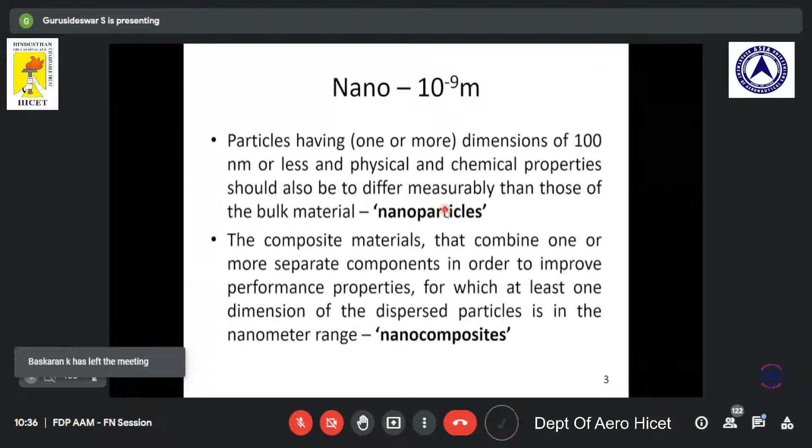When we combine nanoparticles in a matrix, then it is called nanocomposites. We know composite materials combine one or more separate components in order to improve performance properties. So if I disperse a nanoparticle in a matrix, then I can call it a nanocomposite. The purpose of going for nanocomposites is to have better performance - that's why we disperse nanoparticles in a matrix.

This is called nanocomposites. Now I'm going to talk about different nanofillers. Researchers have been using these nanofillers for a long time, since two decades. I will give some idea about different types of nanofillers which we use for different applications. We can categorize the nanofillers based on its shape and size.

You can see the nanoparticles come in layers. You can see it's like a layer where the thickness is nanometer. That's why we call it a nanoparticle nanofiller, wherein the other dimensions are in micron size, but still one dimension is in nano.

So that's why we call it a nanofiller or nano layer. An example is clay, a layered nano layer material. And then we have nanotubes, where you can see the diameter of the nanotube is less than 100 nanometers.

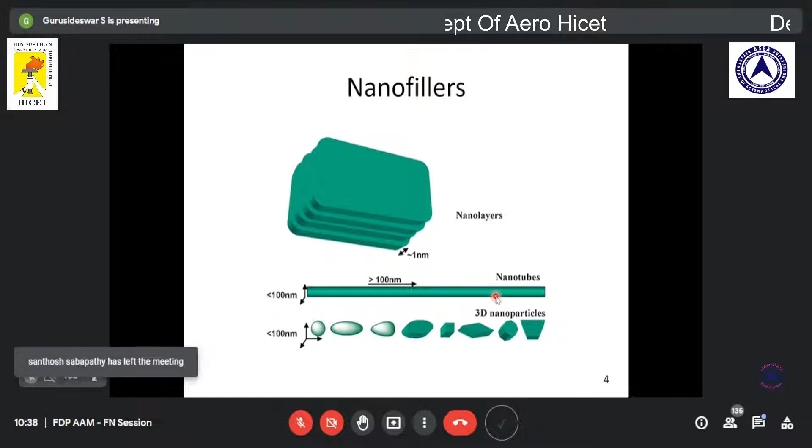So we can say it's an example of a particle nanofiller. The very common example is carbon nanotubes. We have many nanoparticles with different shapes, sphere shape, hexagon, and so on. So I've explained the different types of nanoparticles based on its structure, ranging from layer to tube to different 3D shapes.

So let us discuss nanocomposites, because in this whole talk I'll be focusing on nanocomposites. It's a two-phase material. As I told earlier, a composite is a two-phase material, and the important significance of composites is that we can tailor the properties based on our requirement. That's why we go for composites.

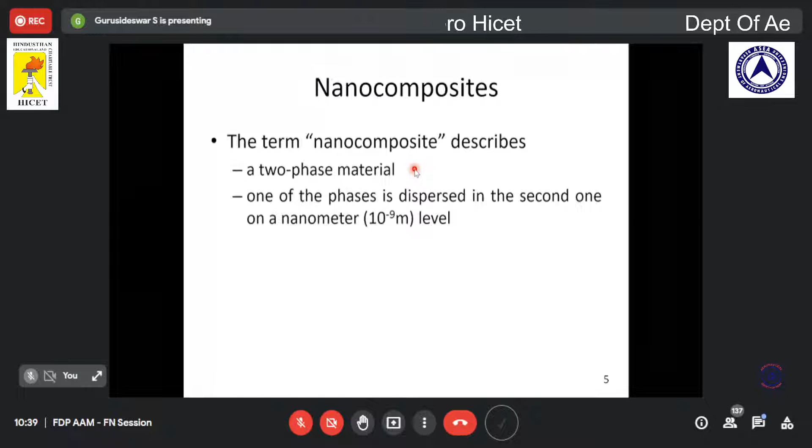Again, it has two phases: one is the reinforcing phase and the other is the matrix phase. We can categorize composites based on the reinforcing phase or the matrix phase. By reinforcing phase, we have fiber composites, particle composites, and flake composites. By matrix, we have polymer matrix composites, metal matrix composites, and ceramic matrix composites. So the composites can be categorized based on the type of reinforcement and the matrix.

Now we are going to see nanocomposites in today's talk. It's a two-phase material where one of the phases is dispersed in the second one on a nanometer level, which is called nanocomposites. In this work we have chosen clay as the nanoparticle and epoxy as the matrix, so we are dispersing clay in the polymer matrix, which is why we call it a polymer nanocomposite.

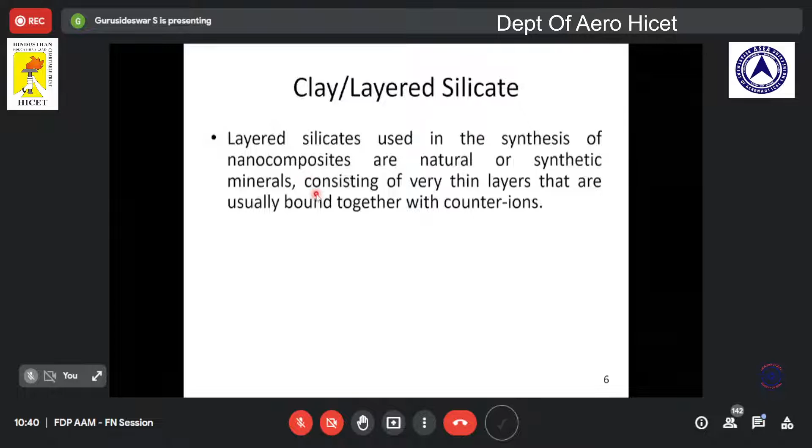Now let's look at the definition of clay. It's a layered silicate, naturally available, consisting of very thin layers usually bound together with counter ions. As I showed in the previous slide as an example of a nano layer, it has a layer thickness of 1 nanometer, and the lateral dimension may vary from 30 nanometers to several microns.

Because of this, we have a very good aspect ratio, which is length by thickness. By using nano clay we can get a very high surface area, around greater than 1,000. The layers are separated by a regular van der Waals gap, called the interlayer or gallery, which we'll discuss in future slides.

So here is the structure of a nano clay, and on the right hand side is a typical scanning electron micrograph of raw clay, taken at around 23,000x magnification. You can see it's like a layer, with nano size thickness and micron size length. But this clay is in raw form, in an agglomerated state, not dispersed in a matrix. We simply took a pinch of clay and got this micrograph using scanning electron microscopy, SEM.

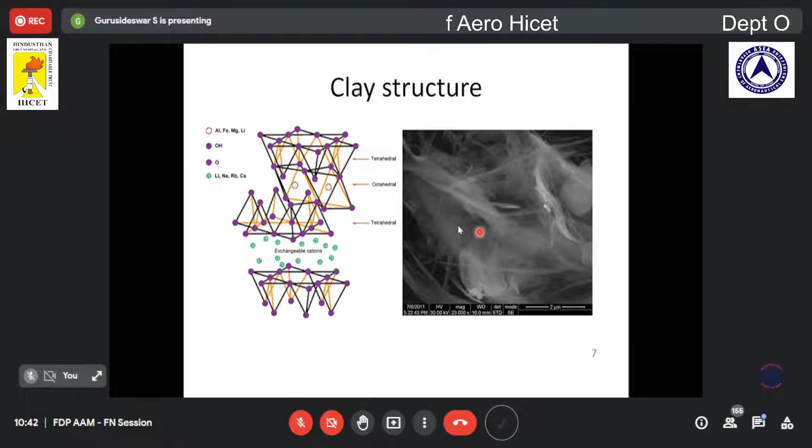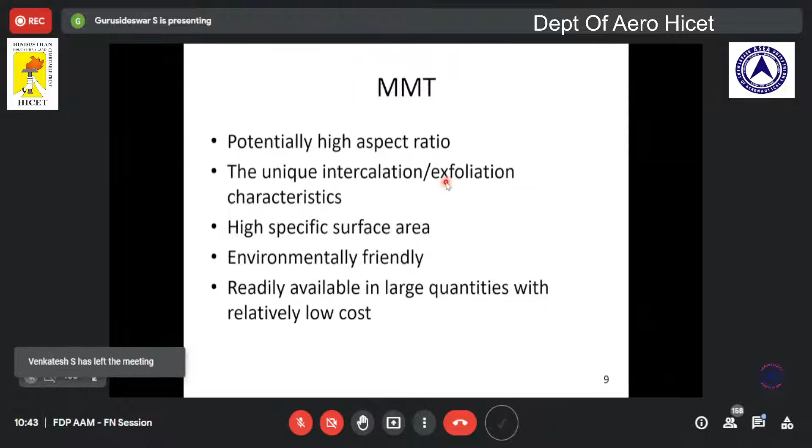So again, here I have given some significance of MMT, that is Montmorillonite clay. It has high aspect ratio, unique intercalation characteristics - I will come back to this terminology later - and it has high specific surface area. It is environmentally friendly, readily available in large quantities, and has low cost. So because of these reasons, we have taken this Montmorillonite clay for our research work.

So again, this slide gives some idea about different types of commercially available clay. As I told, this nanocomposites field has gone up in recent decades, so several researchers have worked on this area, and different types of clay are available commercially. Here I have given some commercial names, like from Southern Clay Products we have Cloisite, we have Garamite - this is the clay which we have used for our research work. We have clay from Bentone, from Elementis, and we have clay from Germany product Nanofil. Like that, there are many different types of clay available commercially.

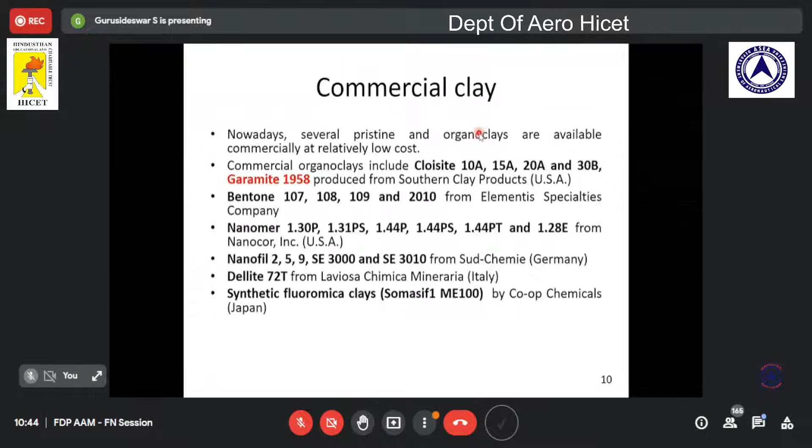Also we have different types of clay. One is pristine clay, that is unmodified clay. I will come back to this point later - why do we go for modified clay? So this is the types of clay which many researchers are focusing on. Let me come to the important point of this clay dispersion.

So this is the layered silicate. Already I have discussed about layered silicate. So to prepare the nanocomposite, we need to disperse or mix the clay with the polymer. So when I mix the clay with the polymer, I will end up with 3 different types of dispersion.

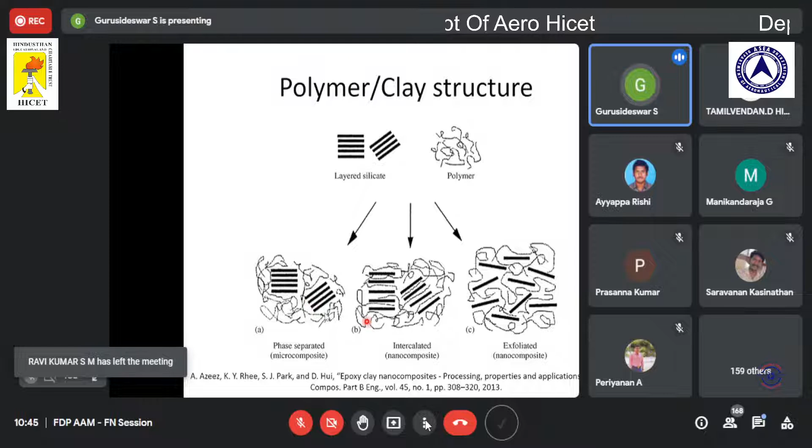So you can see, one is phase separated microcomposites. If you see in this phase separated composites, the particles are in agglomerated stage. You can see this is one type of structure we get, and then intercalated structure.

So this is a structure where we can get a very good dispersion - it's intercalated, where the clay has been arranged and dispersed in a parallel fashion. You can see the figure, you can see the layers.

The third one is exfoliated. So this is the structure which we want. Here you can see the clay has been dispersed randomly, and we have good dispersion. This good dispersion of clay in a matrix will lead to improvement in the properties. So we focus on this dispersion, but it is not easy to get this dispersion. We need to follow some techniques to get this good dispersion. Let us see in detail in our next slides.

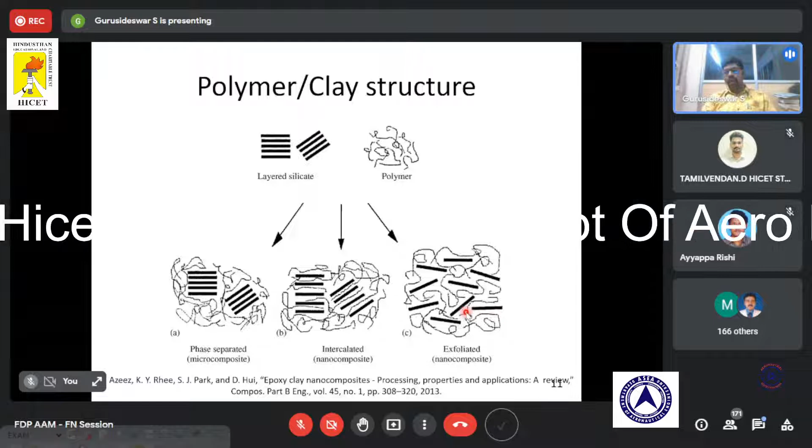So in this slide I wanted to convey that by mixing a nano filler in a polymer, we end up with 3 different types of structure - one is phase separated, then intercalated, and exfoliated. Among these 3 structures, we focus on exfoliated. This is the structure which we want, and from this structure we can get a very good improvement in the mechanical properties.

Okay, here I have just given the history of nano clay. It has been used by Toyota researchers in Japan in the 1990s. They discovered this possibility to build a polymer layered silicate nanocomposite. They dispersed this nano clay in a polyamide matrix, fabricated the nanocomposite, and then did a lot of characterization. They found the addition of nano clay in the polymer matrix led to very good improvement. So this is the very first research made on nano clay, and then later it was extended to epoxy.

So earlier they focused on polyamide, and then many researchers extended this work to different polymers, not just epoxy, but polyester, like that. And then they have conducted many works in this area.

So now so far I have talked about what is composite, what is nanofiller, what is nanocomposites, different types of nanofillers, the dispersion of nanofiller in epoxy, and the history of nanoclay - like that we have discussed so far. Now let us see how to prepare the nanocomposite. So this is a very important topic, right? Let us see how to prepare a nanocomposite.

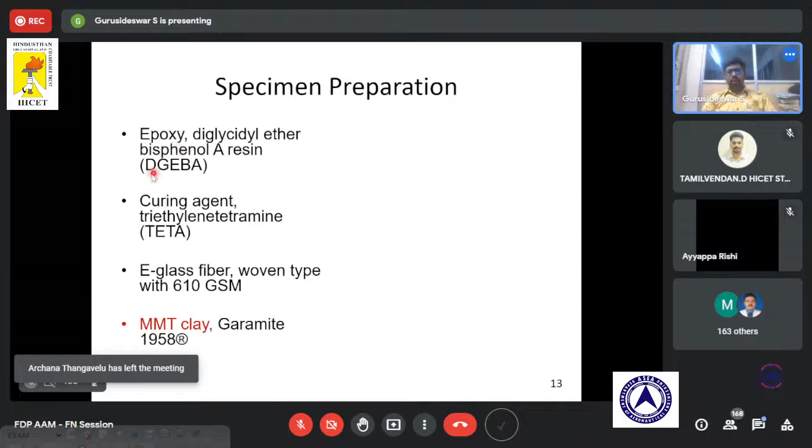So in this work, we have used epoxy. Epoxy is a thermoset polymer. We have used diglycidyl ether of bisphenol A resin. It's a commercially available resin, which was bought from Huntsman supplier. And then we used a curing agent - I hope many of you know in this area, we have 2 different types of curing agent: one is anhydride and amine type curing agent. This type of curing agent we can keep at room temperature itself.

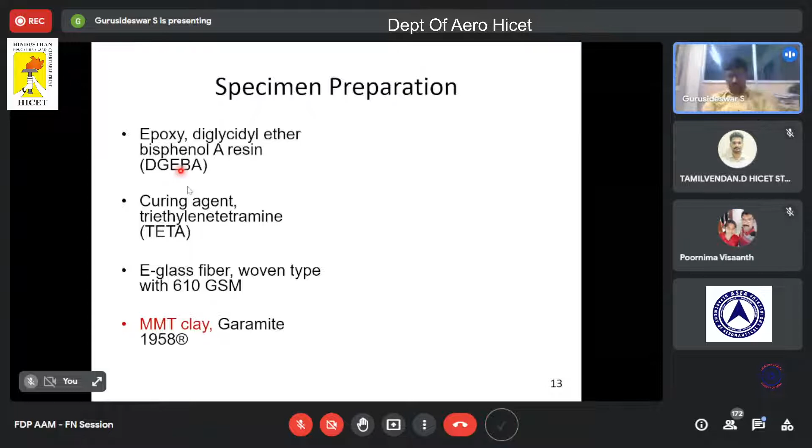And then we also focus on hybrid nanocomposite, because we wanted to understand the effect of clay on a traditional composite. So in the whole work, we are going to see 2 different types of material. One is purely polymer epoxy clay nanocomposites, where we disperse the clay in epoxy.

And the second one, we are going to disperse the clay in a traditional composite, like a traditional FRP composite. So we have used an e-glass fiber, which is commercially available. It's a woven type fiber, with 610 GSM, grams per square meter. This is the primary reinforcement, and we add clay as a secondary reinforcement.

As I told earlier, we used modified montmorillonite clay, and the commercial name is Garamite 1958, which was supplied by Southern Clay Products USA.

So now, to prepare the nanocomposite, we need to design the parameters. We need to focus on how much amount of clay we are going to add. Based on our survey, we found that higher clay weight percentage leads to poor dispersion. So that is why we stick with 5 weight percentage. If we go beyond 5 weight percentage, then we may not get good dispersion of nano clay with polymer.

So based on the survey, we have chosen these 3 parameters. For example, 1.5 weight percentage means we take 100 grams of resin and 1.5 grams of nano clay, and then the clay is mixed with epoxy like that. So we took 3 different weight percentages of clay to fabricate the nanocomposite samples.

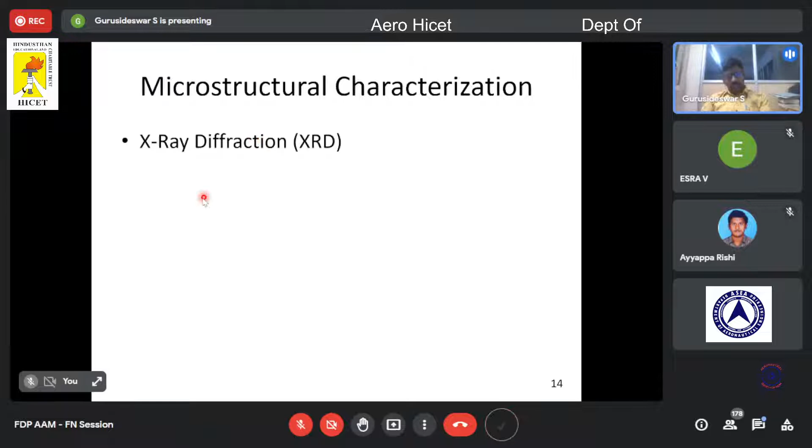Now it is very important to understand how the clay has been dispersed in epoxy, because as I told earlier, we are working at the nano level. We cannot see the dispersion with our naked eye. So we need to go for some high-end tools to understand the dispersion of nano clay in the epoxy matrix.

We have used scanning electron microscopy, transmission electron microscopy, laser-induced breakdown spectroscopy, and also some other techniques to understand the dispersion of nano clay in the epoxy matrix. This slide shows the wide-angle X-ray scattering.

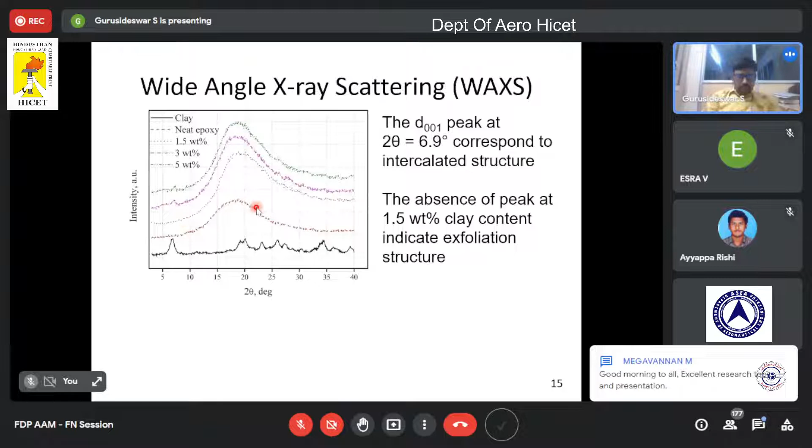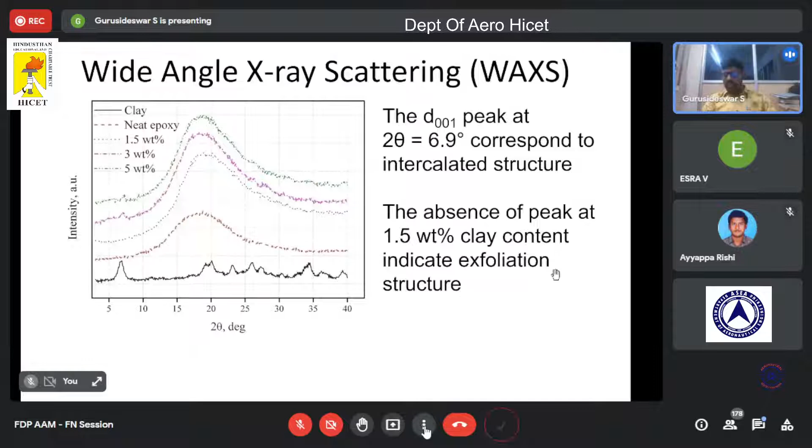Here you can see the observation of a peak at D001, which corresponds to the intercalated structure. If you observe carefully, we do not see any peak for 1.5% clay. That means 1.5% clay provides good dispersion. So this is what we understand from this wide-angle X-ray scattering. The absence of a peak at 1.5% clay content indicates an exfoliated structure, which indicates random dispersion of clay in epoxy.

So here I have given a pictorial representation of the different structures. You can see the intercalated structure - we do not see good dispersion here, the clay has been arranged in some parallel fashion, in a bit of an agglomerated state. Whereas on the right hand side, this exfoliated structure shows the clay dispersed randomly. This is what we want, and this dispersion we achieved at lower clay loading, around 1.5%.

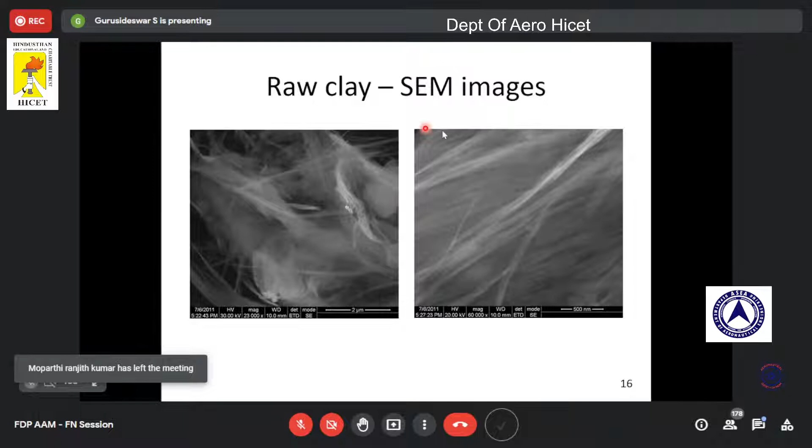So here I just wanted to show the different magnifications of raw clay. This left hand side micrograph shows low magnification, around 23,000x.

You can see it is an agglomerated state, wherein the right hand side shows higher magnification of nano clay, around 60,000x. This was taken using scanning electron microscopy.

We also performed small angle X-ray scattering. In wide angle scattering, the angle ranges from 0 to 40 degrees, but we wanted to focus only on small angles, since the D001 peak corresponds to the intercalated structure. That's why we did small angle X-ray scattering, from 0 to 10 degrees.

We observe the same trend here. The black line shows agglomerated raw clay, and the red line shows 1.5%, where we do not find any peak, indicating good dispersion. Whereas 3% and 5% show a peak, meaning the dispersion is less uniform.

Here you can see the transmission electron microscopy. In the last figure I showed scanning electron microscopy, where the micrograph was taken at the surface level. In TEM, the electrons transmit through the sample.

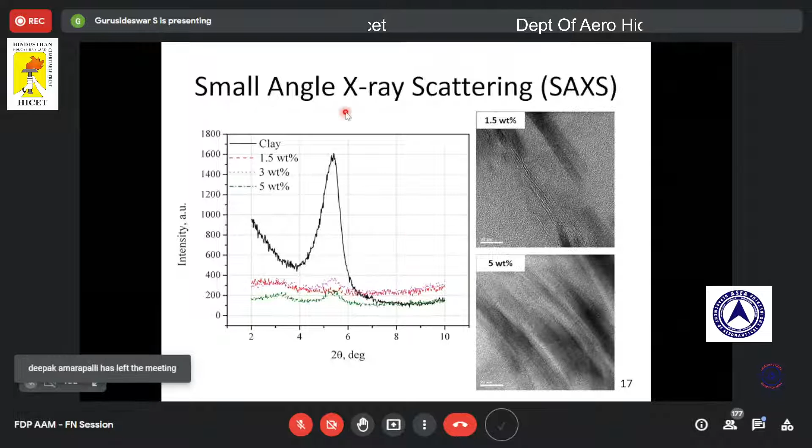This is the transmission electron microscopy image of 1.5% and 5% clay. For 1.5% you can see random dispersion, but for 5% it has agglomerated. So we have understood the dispersion of clay using different techniques: wide angle X-ray scattering, small angle X-ray scattering, and TEM.

We also employed laser-induced breakdown spectroscopy. This equipment is available at IIT Madras with Professor Nilesh J. Vasa. We send laser energy onto the sample and understand the different compositions in epoxy.

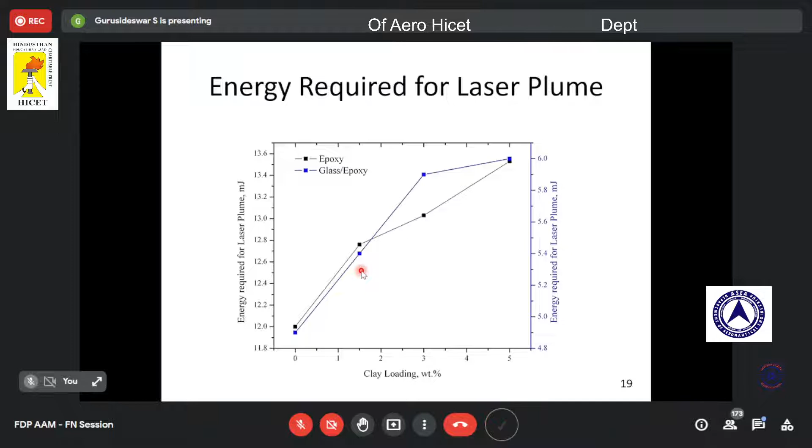We observe the same trend for glass epoxy composites. The blue shows glass epoxy, again at 0, 1.5, 3, and 5%. For neat epoxy without clay, we need 12 millijoules, whereas for 1.5% we need higher energy, 12.6. So the idea is that addition of clay in epoxy and glass epoxy leads to higher consumption of energy to produce laser plume.

Now let us focus on mechanical characterization. So far we discussed microstructural characterization; now let us come to the mechanical characterization of nanocomposites. How are we going to characterize the mechanical performance of nanocomposites? Using different techniques: tensile testing, flexural testing, impact testing, hardness, and so on.

I'm going to brief each testing one by one, and mention the standard we used. For tensile testing samples, we used a dog bone sample as per ASTM D638, and performed the testing using a universal testing machine.

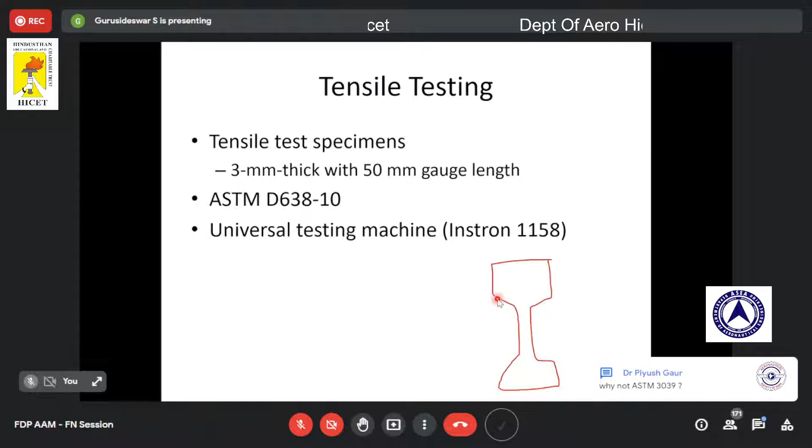So we used a dog bone shaped sample. I hope many of you are aware of the dog bone sample, which we used to understand the tensile behavior. The purpose of having a larger area is to avoid stress concentration, because this grip area will be rigidly fixed in the tensile machine. So in order to avoid grip failure, we have higher surface area, and also if you have a sharp corner, this will lead to stress concentration. That's why we go for this curvature, so that we can expect the failure to happen at the gage length, so that I get accurate results. That's why we go for the dog bone sample.

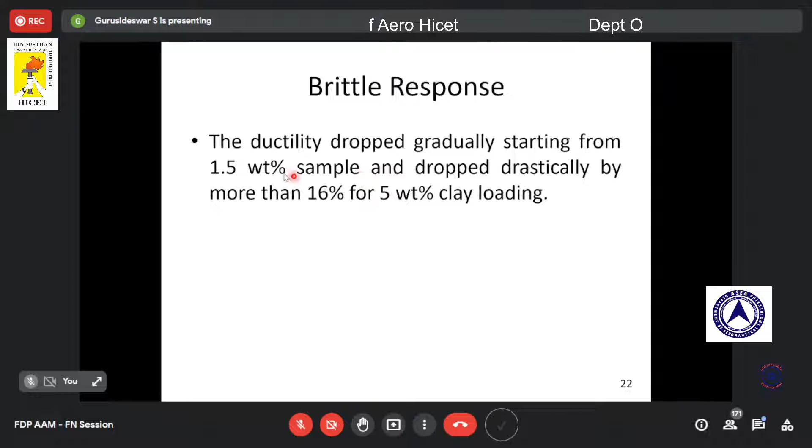This has ASTM standard D638, and this is the response we get from the tensile testing. As clay is a brittle material, we expect that when we disperse clay with epoxy, there will be a drop in ductility. This is what we observe, and the same observation was also reported by many researchers.

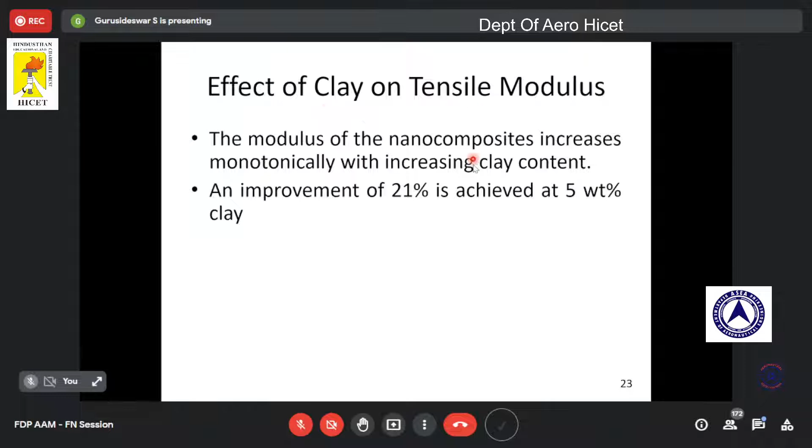Here I have presented the effect of clay on tensile modulus. The addition of clay in epoxy leads to good improvement in tensile modulus because of its good dispersion and because of the good interfacial adhesion between the nanoparticles and the epoxy matrix.

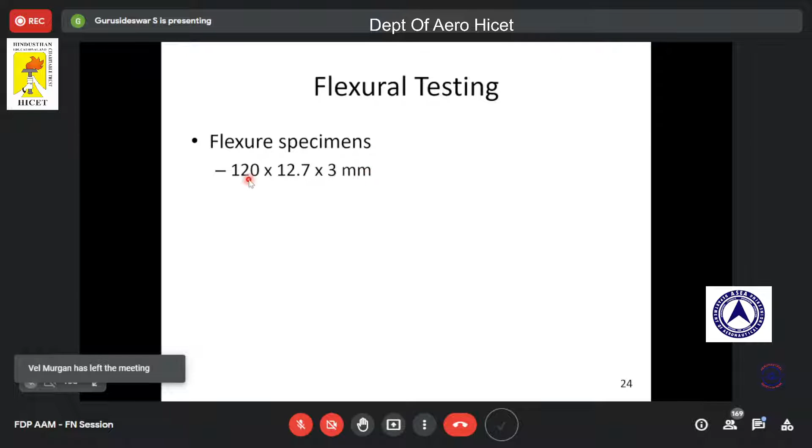And then for flexural testing, again we used small beam samples as per ASTM D790, and we used a 3-point bending configuration. You all know 3-point bending configuration - it is supported on two supports, and the loading acts at the middle of the beam. This is a typical 3-point bending configuration.

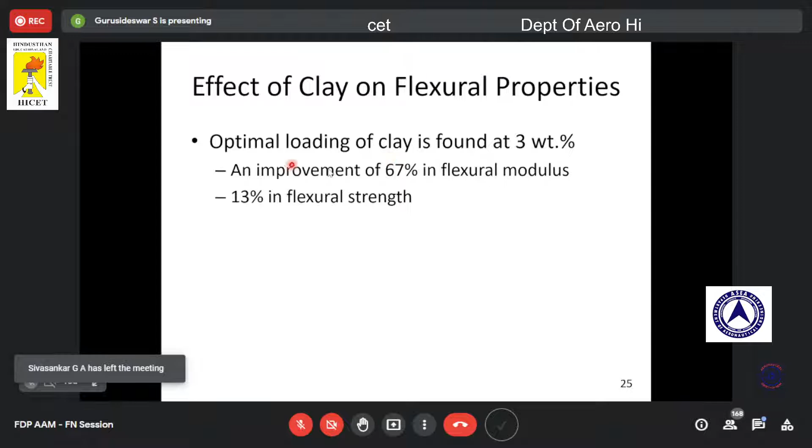So, the effect of clay on flexural properties. Again, similar to tensile properties, we found improvement in flexural modulus by addition of clay, and also good improvement in flexural strength. But one drawback is that we found voids at higher clay content, and these voids lead to premature failure.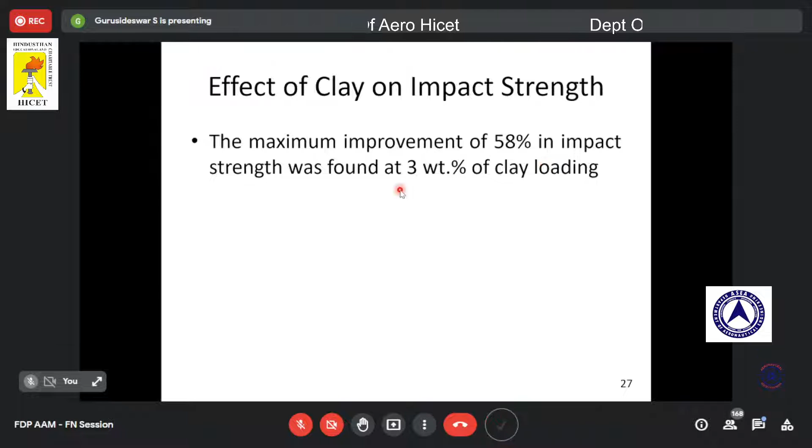Then we performed impact testing as per ASTM standard D256 - this is the sample dimension. Again, we got good improvement in impact strength by addition of clay in epoxy. But as I told earlier, at higher clay loading, because of agglomeration and voids, we could not achieve good improvement for higher clay loading samples.

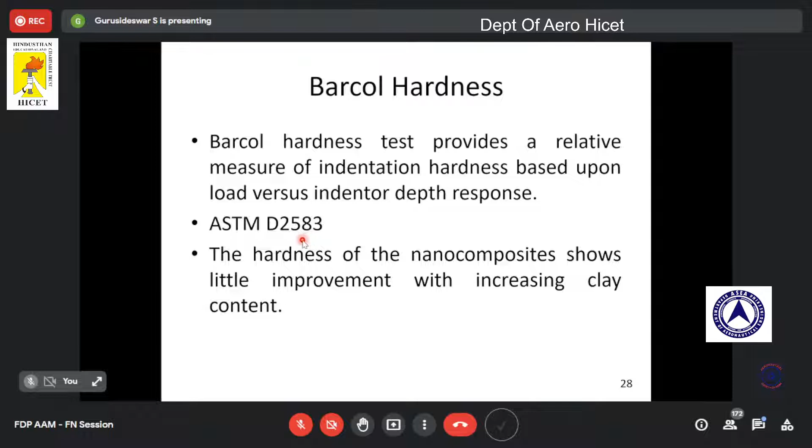And then barcol hardness testing was also done as per ASTM standard D2583. The hardness again shows improvement with increasing clay content.

Here I have consolidated the effect of clay on mechanical properties. The addition of clay in epoxy leads to about 21% improvement in modulus and 15% improvement in strength, in tensile testing. Again, a very good improvement in flexural modulus, around 22% improvement in flexural strength, and around 58% improvement in impact strength.

This is a typical fracture surface of the epoxy - this figure was taken after tensile failure. We took the failed sample to the SEM, scanning electron microscopy, and captured this micrograph. This shows a typical brittle failure, as we can observe from this micrograph.

We also wanted to understand the effect of clay in glass epoxy. As I mentioned earlier in my previous slides, throughout this talk we use two materials. One is polymer nanocomposites, where we disperse clay in epoxy and study its mechanical performance. The second is understanding the effect of clay in a traditional composite. You know a composite, right? FRP is a composite where the fiber is the major reinforcement and the polymer is the matrix. So in a traditional composite material, we added nano clay and found good improvement. Here I have listed the improvement in mechanical properties when we disperse clay in glass epoxy composite.

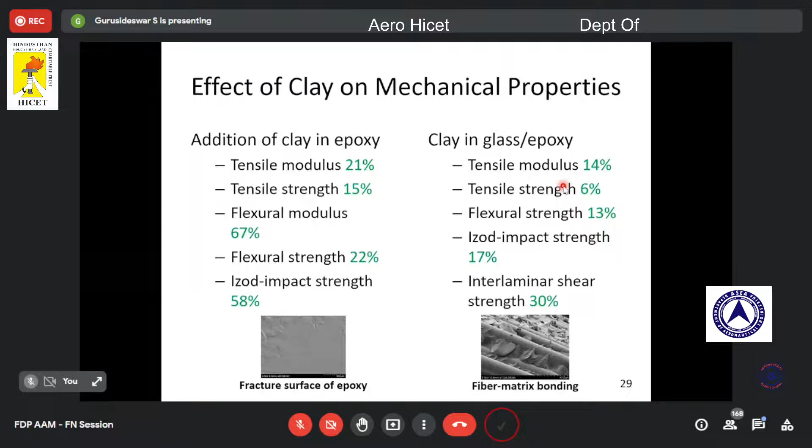We were also curious to understand the effect of clay on electrical properties, so we have done some work there. One is breakdown voltage. The breakdown voltage is a property of an insulator, which we call breakdown strength. From this test we observed that addition of clay leads to better breakdown strength.

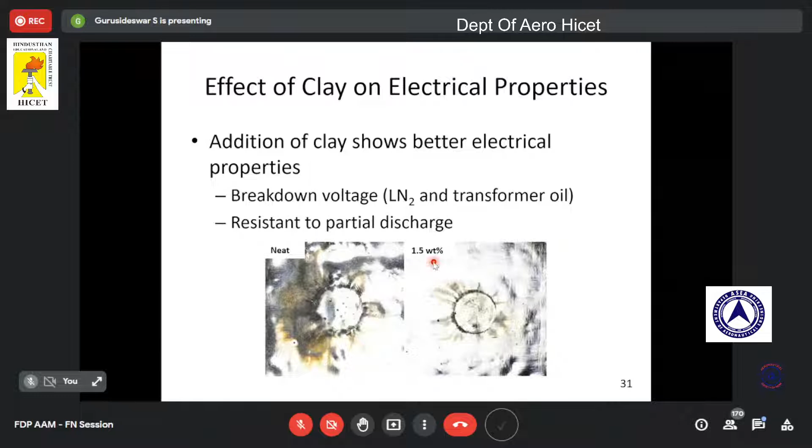The sample was subjected to high voltage, around 5 to 10 kV. You can see the photograph after the application of electric voltage. The neat sample shows major damage, whereas the sample having 1.5% clay with epoxy shows minimal damage. So the idea is that addition of clay in epoxy leads to better electrical properties. This is what we observed from this breakdown voltage test.

Now I have come to the important objective of today's talk. Let me focus on this topic for a while. The main objective of today's talk is to understand the high strain rate testing of composites. This was my primary objective. So why do we go for high strain rate testing?

This is what we have to answer: why do we go for this testing, what is the necessity? I have just listed out the reasons. In general, materials are sensitive to strain rate, and polymer composites also are very sensitive to strain rate. That's why we need to understand the strain rate behavior. Also, in practical applications, the composites will be subjected to high velocity dynamic loadings, so it is very important to understand their properties at dynamic loading. And also, for development of dynamic failure criteria, we need the properties at high strain rate. That's why we have to understand the properties of composites at high strain rate.

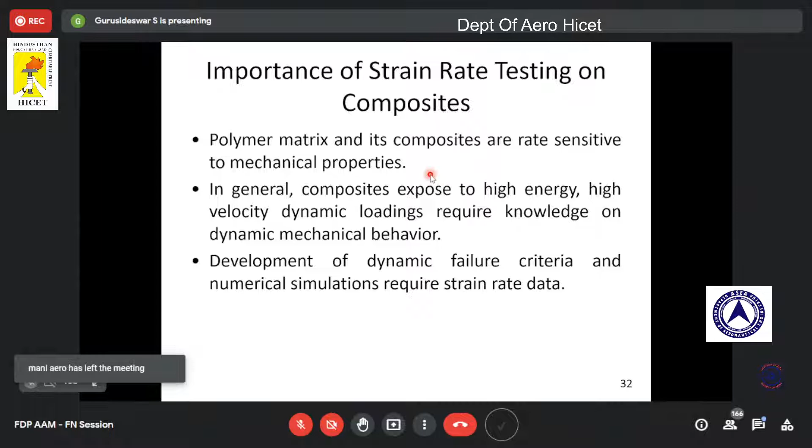So we have done two different characterizations: one is low strain rate and high strain rate. I will explain the different types of strain rates in my next slides. For low strain rate characterization, we have used a universal testing machine, and we have done the characterization at different cross speeds.

Here I can explain the strain rate. 0.5 mm per minute is the cross speed of the UTM machine, the speed at which I can pull my material. This speed can be converted into strain rate by dividing by the gage length. When I divide by the gage length I get some value, which is called strain rate. Generally we indicate the strain rate in per second, so 0.5 mm per minute can be converted to mm per second, and then that value has to be divided by the gage length to get the strain rate.

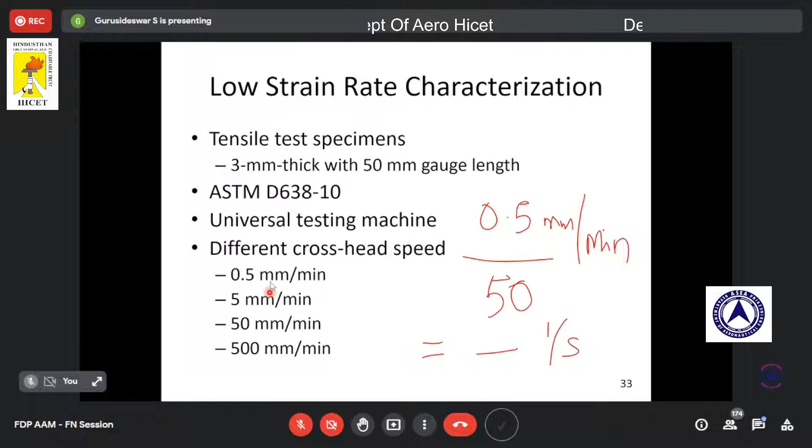To get different strain rates, we need to have different velocity, or different cross speed. So we used an Instron machine where we can set the speed, which varies from 0.5 to 1000 mm per minute. We chose four different cross speeds: 0.5, 5, 50, and 500 mm per minute. Generally we do 5 mm per minute for quasi-static loading to understand the mechanical properties, but here we used different velocities to understand the behavior of the material at different strain rates.

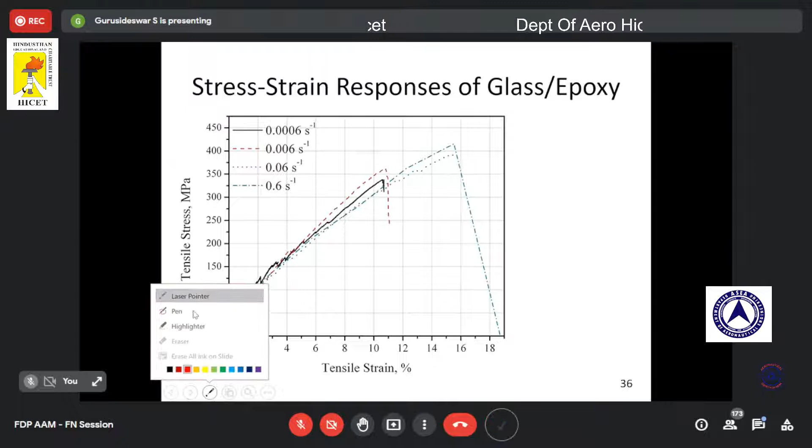So again, this 0.0006 corresponds to 0.5 mm per minute, and this corresponds to 500 mm per minute. One can question me why the number is changing, because for epoxy samples I get 0.001, but for glass epoxy I'm getting 0.0006. The reason is because the gauge length of the sample is 50 mm, but here the gauge length is I think 25 mm. That's why we have a change in this data.

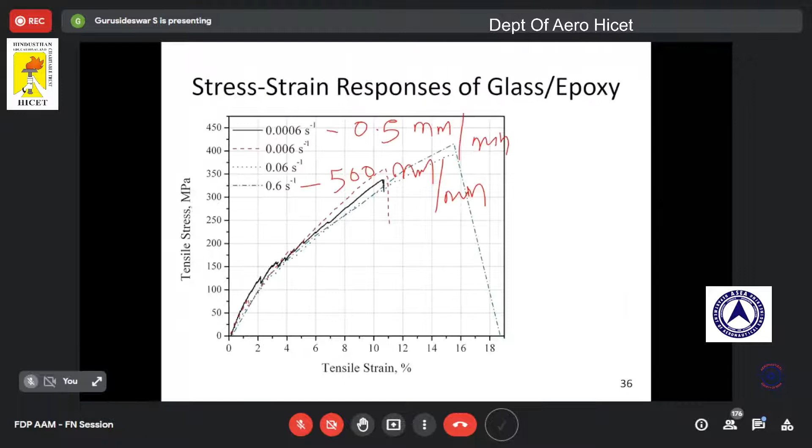Here you can see the black shows the stress-strain curve of the glass epoxy at the lowest strain rate, 0.0006, 0.5 mm per minute, whereas this blue shows the stress-strain curve of glass epoxy at higher strain rate, around 500 mm per minute. You can see there is a drastic increase in the strength. So this is what we observe from glass epoxy composites.

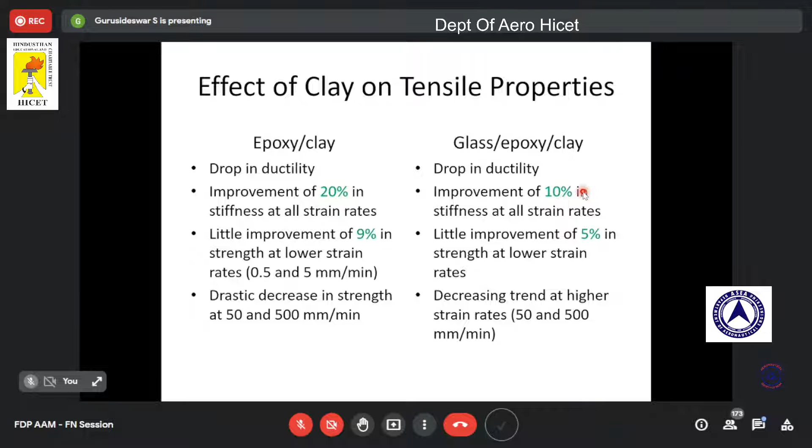So this is the effect of clay on tensile properties, which we have observed. As I told earlier, there is a drop in ductility, an improvement in stiffness, and an improvement in strength, and these results which we got for glass epoxy clay composites. So we have found that both epoxy, glass epoxy, and both epoxy clay and glass epoxy clay composites are rate sensitive. This is what we observed from this study.

Now, so far we have focused on low strain rate. By using UTM, I can have different crosshead speeds, I can do different strain rates. Now, how can I achieve higher strain rate? Again, there is an important thing we need to discuss.

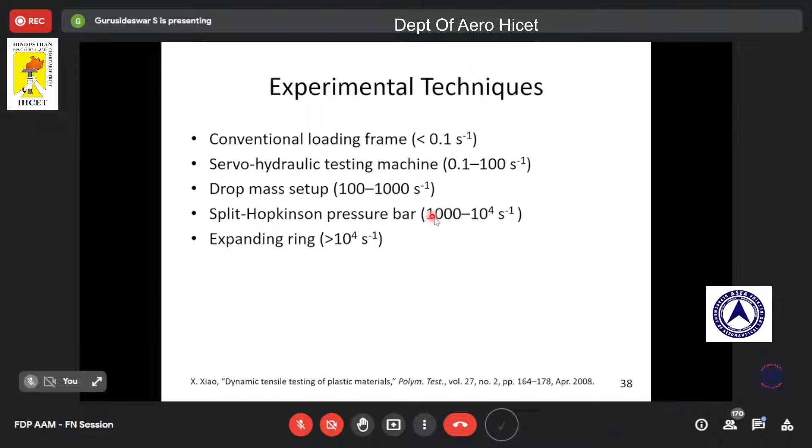So here I have listed out the different techniques for high strain rates. For less than 0.1 per second, we can use a conventional loading frame. For 0.1 to 100 per second, we can go for a servo-hydraulic machine. For 100 to 1000 per second, we can use a drop mass setup. For above 1000 per second, we can use a split Hopkinson pressure bar. For above 10 power 4 per second, we can go for an expanding ring. So in this research work, in today's talk, I am going to focus on the drop mass setup, which we have employed to achieve high strain rates.

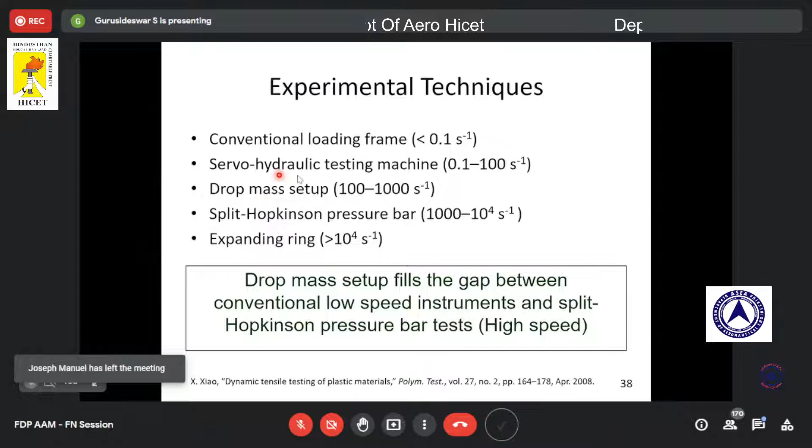We found a gap in the literature. People have focused on low strain rate and high strain rate, but we could not find enough literature on this intermediate strain rate, from 100 to 1000 per second. So we made an attempt to do testing in this region, employing a drop mass setup that was indigenously designed and fabricated at IIT Madras. Today I'm going to share results from experiments done on this drop mass setup.

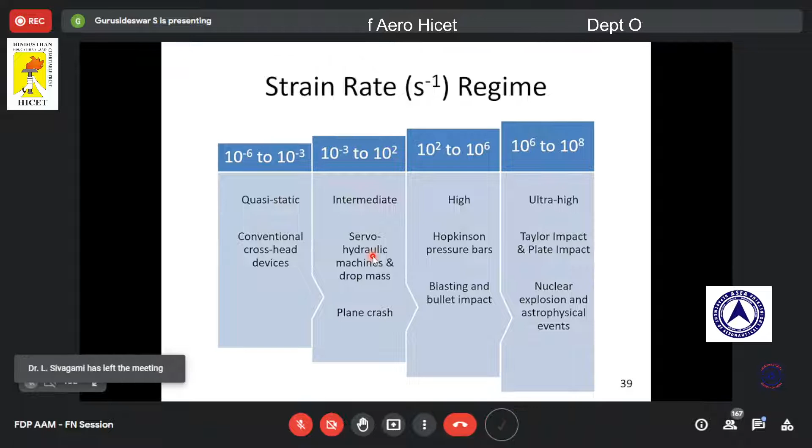I wanted to explain the different strain rate regimes. 10⁻³ is the region of static loading, and 10⁻³ to 10² per second is the intermediate strain region, where we use servo-hydraulic machines or drop mass. Plane crash and vehicle crash subject materials to this kind of loading, so it's important to understand material properties at this regime. For high strain rate, we go for the split Hopkinson pressure bar.

This range is 10² to 10⁶, and its applications are blasting and bullet impact. Structures subjected to bullet impact will experience this strain rate, so we need to understand material properties in this region.

For ultra high strain rates, like nuclear explosions or astrophysical events, we go for Taylor impact or plate impact testing. So this gives a basic idea about the different strain rate regimes, the techniques available for achieving these strain rates, and their applications.

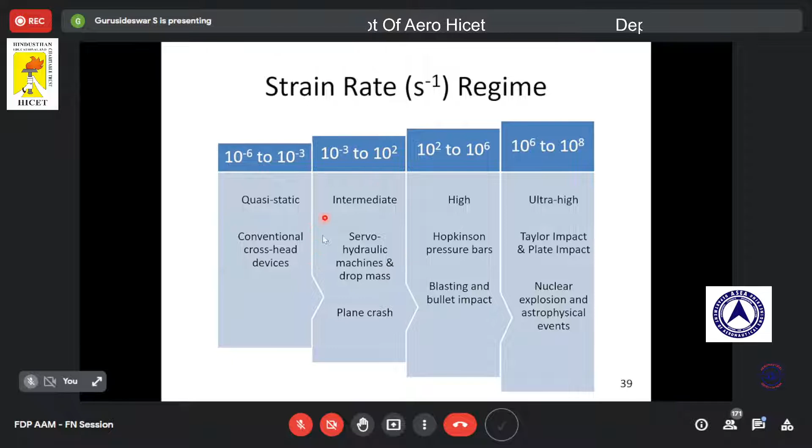In today's talk, I'm going to focus on the intermediate strain rate regime. For that, we have used a drop mass setup, so I'm going to focus on this area.

Now I'll give the drop mass setup details. The advantage of the drop mass setup is that we can achieve intermediate strain rates from 100 to 1000 per second, it's inexpensive, it can accommodate different geometries, and it provides easy variation of strain rate.

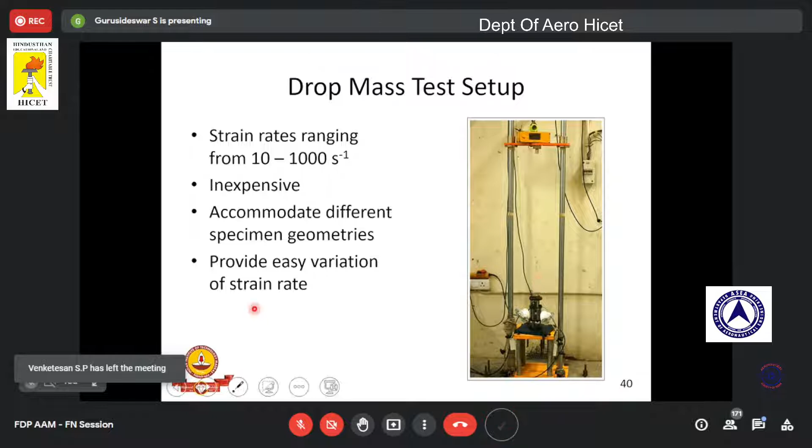This is a typical photograph of a drop mass setup. Just by dropping the mass, we can achieve different velocities. From the law of conservation of energy, velocity V equals root of 2gh. So when I change the height, I can change the velocity also. This is the basic principle, and based on it we achieve different velocities.

Different velocities lead to different strain rates. We chose 3 different heights, say 0.5 meter, 1 meter, 2 meter, and so on. By dropping the mass at different heights, we get different velocities, which lead to different strain rates. As I told you earlier, strain rate is nothing but velocity divided by the gauge length. This is what we achieved using this drop mass setup.

Now we need to focus on the fixture. We have identified the equipment to achieve different velocities by dropping the mass at different heights. Now the main challenging task is: how am I going to fix the sample, and how am I going to extract the data? This is a very important thing.

For that we designed a fixture. This whole fixture and setup has been patented, published, and we were able to get the grant. Here you can see it has a mobile jaw, where the sample is fixed. Let me show using a pen: when the drop mass hits this fixture...

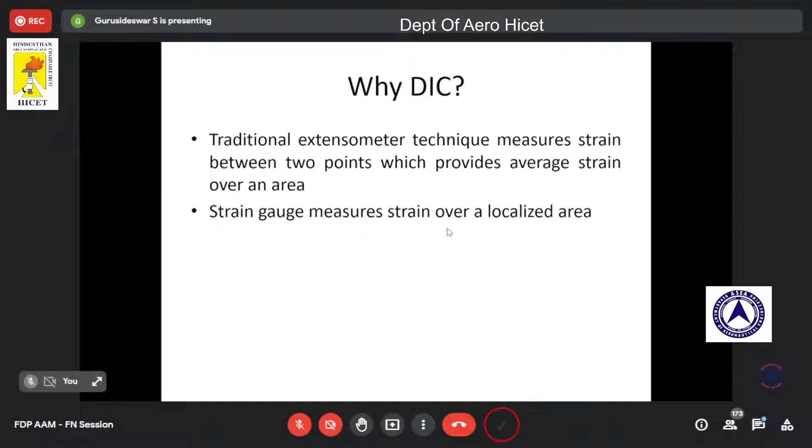But the strain gauge will give strain over a small area. With DIC, the technique which I am going to explain today, it provides full field strain data - that is its significance. So by using extensometer, we get strain between 2 points. By using a strain gauge, we get strain data over a small area. But with the help of DIC system, it is possible to get the strain data for the whole field, the full field strain data. So this is a technique which we have employed to get the strain data.

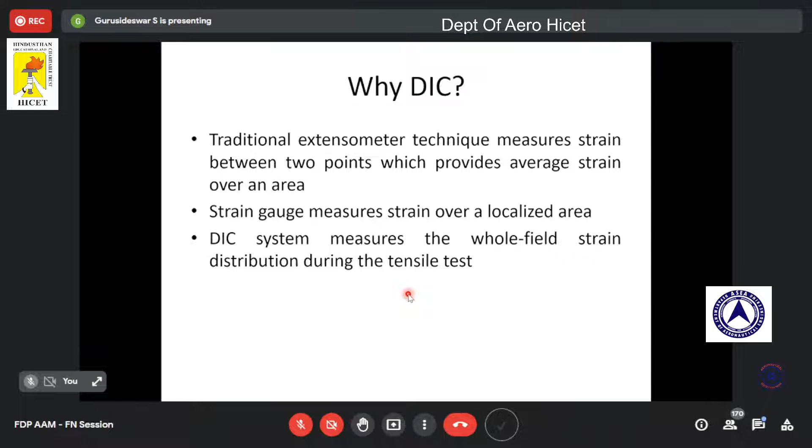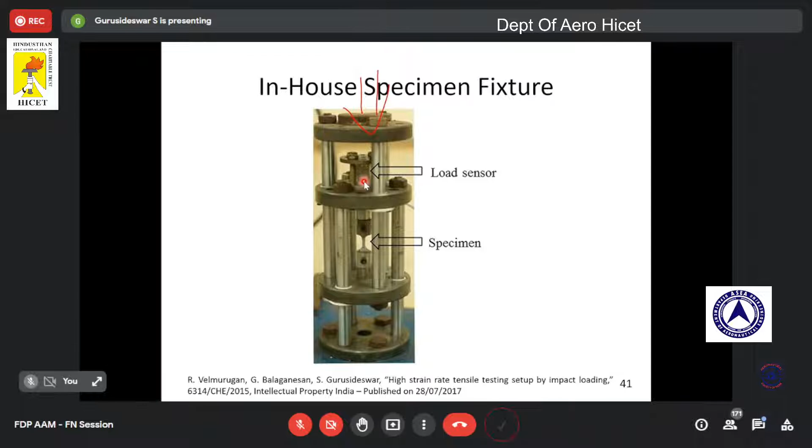So in my previous setup, I was telling you how to achieve different strain rates - by changing the mass and height, we can have different velocity, and also we use a load sensor to get the load data. So for strain data, we use this DIC technique. It's a non-contact strain measurement technique that we will discuss in my next slides. Because to draw a stress-strain diagram, I need load data and strain data. So the stress data can be taken from the load sensor, and the strain data can be taken from this DIC system. This is what we have used in this research work.

Fine, so now application of DIC. I want to give you a quick idea about the applications, because as I told earlier, this DIC is a full field strain technique - I can get the strain data over the entire sample surface. So it is being used in fluid mechanics to measure the velocity fields, and we can use DIC in thin films, because we know it is difficult to test a thin film.

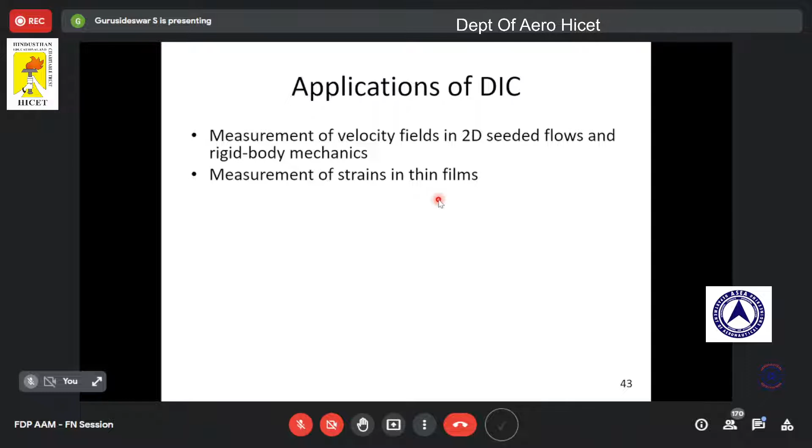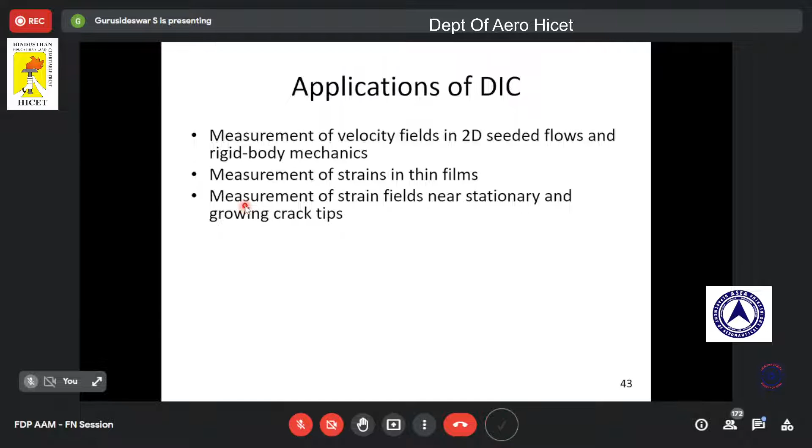It is difficult to use extensometer or strain gauge for thin film, right? So with the help of DIC, we can measure strains from thin films, and we can use DIC to measure the strain field near the crack tip. In fracture mechanics, we know at crack tip we experience a large strain, so to understand the strain field at the crack tip, we can go for DIC. Also we can use DIC for crack tip opening displacement, and also in concrete, we use DIC to get strain data. So it has a wide range of applications, and also it is a non-contact measurement technique.

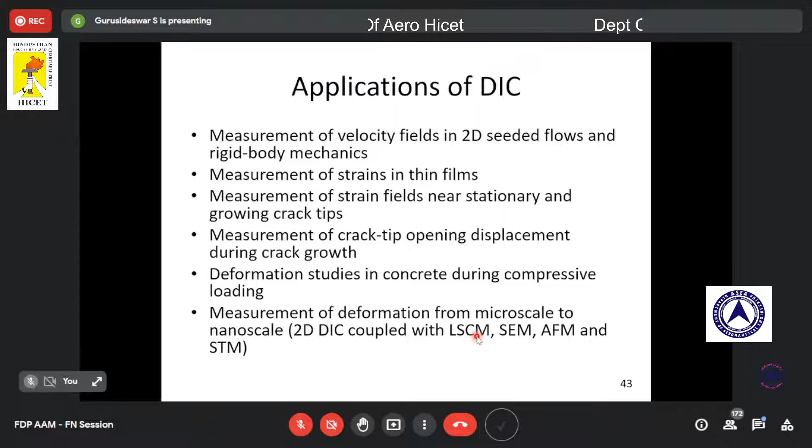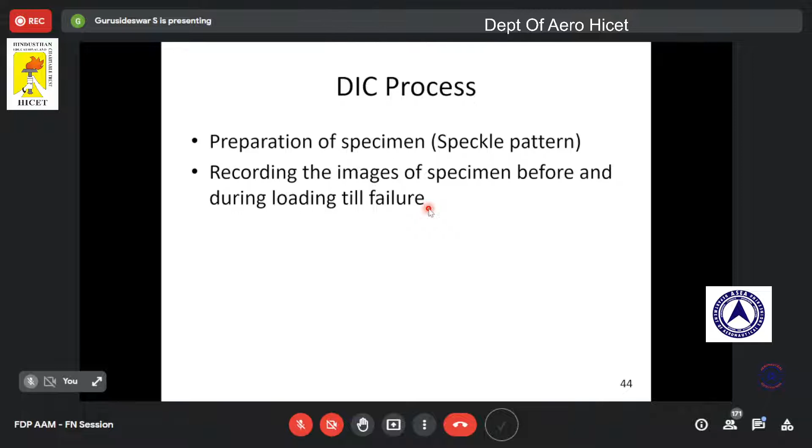Okay, so this is about the application of DIC. Now let me show the DIC process - it has 3 steps. First, you need to prepare the sample, make a speckle pattern, and record the images before and during the loading until failure. So we need to use a camera - by using a CCD camera, we can record the images, and then post-process the images using an algorithm. So these are the 3 main steps in the DIC process. By following these 3 steps, we can get the full field strain data of a material.

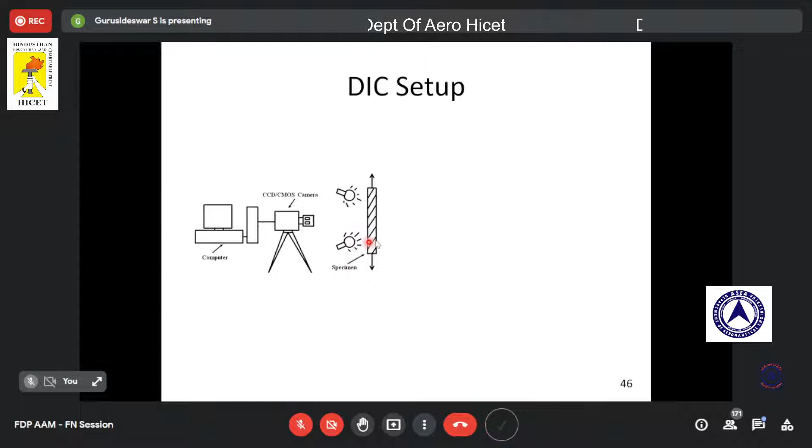So we'll take a reference image, and while loading, we have to record the images till the failure point. Once the images have been recorded, then we can do the post processing, and understand the strain variation along the surface of this material.

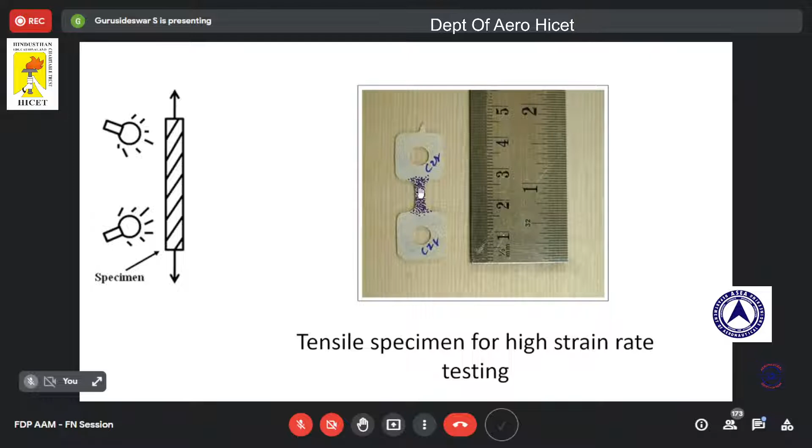So this is the sample which we have used for this high strain rate testing. Based on the literature survey, we have chosen this sample. It is 3 mm width and 10 mm gauge length, and here we have taken the speckle pattern. So this is a speckle pattern.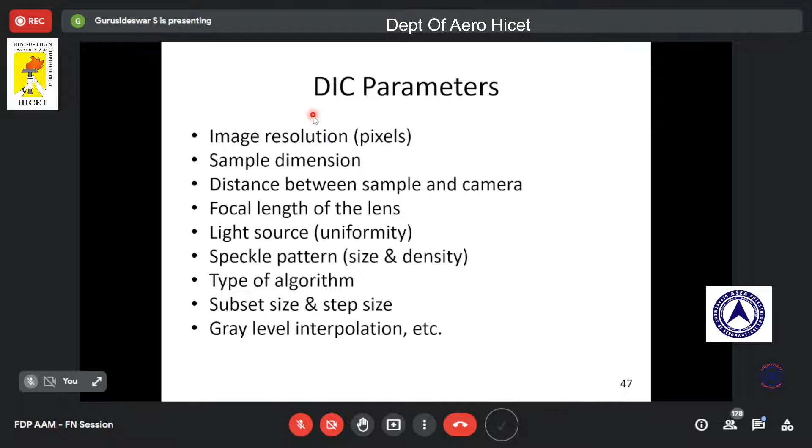So this is the important step in DIC: sample dimension, distance between the camera and sample, focal length of the lens, light source, speckle pattern - how am I going to make the speckle pattern - and then type of algorithm. So many parameters we have to set to get better results.

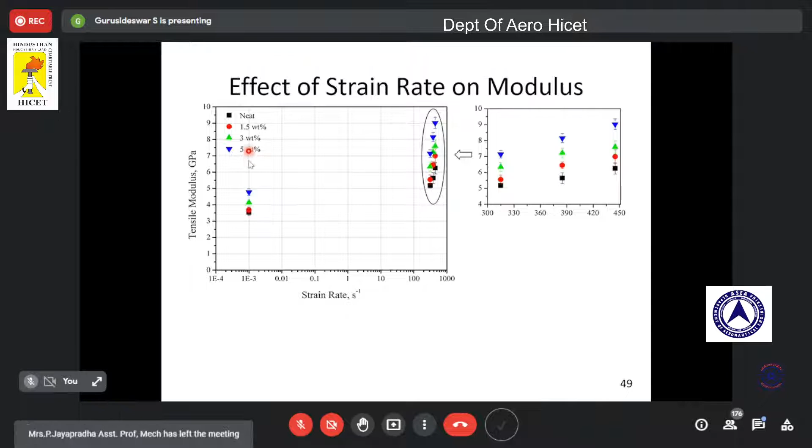So here I have shown the effect of strain rate on modulus. This whole data was done at quasi-static loading for different clay samples, from neat epoxy to 5 weight percentage clay sample, and this is at high strain rate. So here I have shown the enlarged view.

As I told earlier, we took 3 different heights, so we got 3 different velocities: 315 per second, 385, and 450. There is an increase in the modulus value, and the same trend has been observed for clay samples. You can see this red shows clay sample 1.5%, and the green shows modulus for 3 weight percentage.

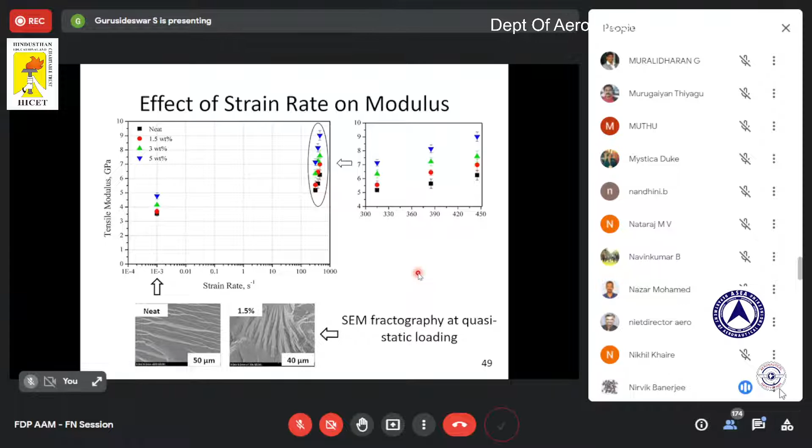Yeah, it's done, sir. You may proceed, sir. Sorry for that, thank you sir.

So here this data shows two important understandings. One, you can see the modulus is increasing with respect to strain rate - we can say that the material is rate sensitive. This is the one data we can observe from this graph. And one more data, we can see there is an increase in modulus by addition of clay.

For neat epoxy we got around 5 gigapascal, wherein for 1.5 percentage we got around 5.5, for 3 percent we have got 6.5 gigapascal, and for 5 percentage we have got 7 gigapascal.

We can interpret this data in two ways. One, the addition of clay leads to increase in tensile modulus, which we can observe at all strain rates, at quasi-static and at high strain rates. You can see there is an increase in the modulus by adding clay to epoxy at all strain rates. Second interpretation, we can see the material is rate sensitive.

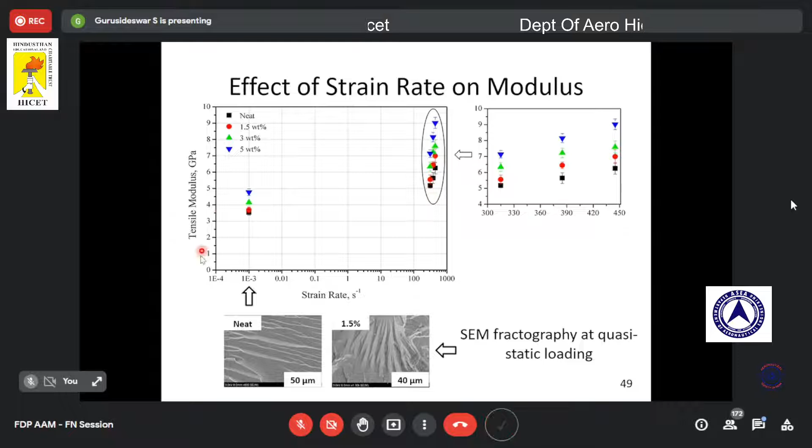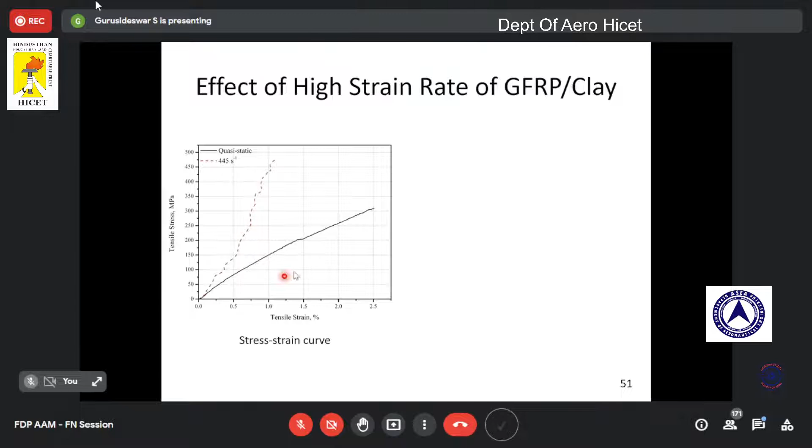Here we observe the same trend. For quasi-static, we have got around 300 megapascal as strength, but when I do the testing at high strain rate, there is a drastic change in the strength and stiffness. You can see the slope - there is a very steep slope, indicating the stiffness or modulus of the composite.

So now I have come to the end of my talk.

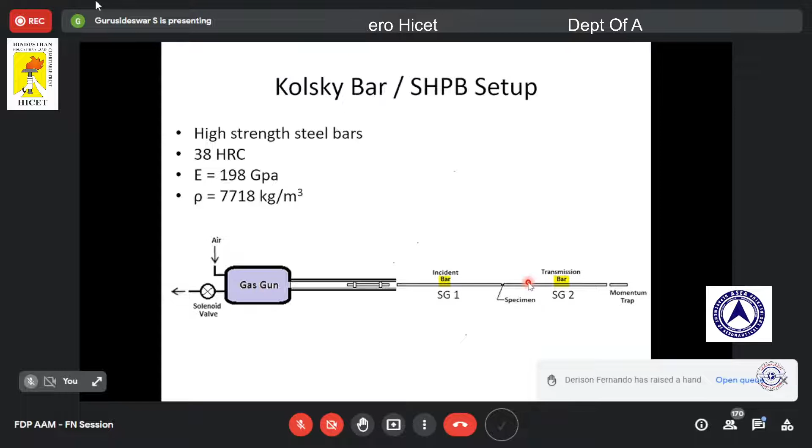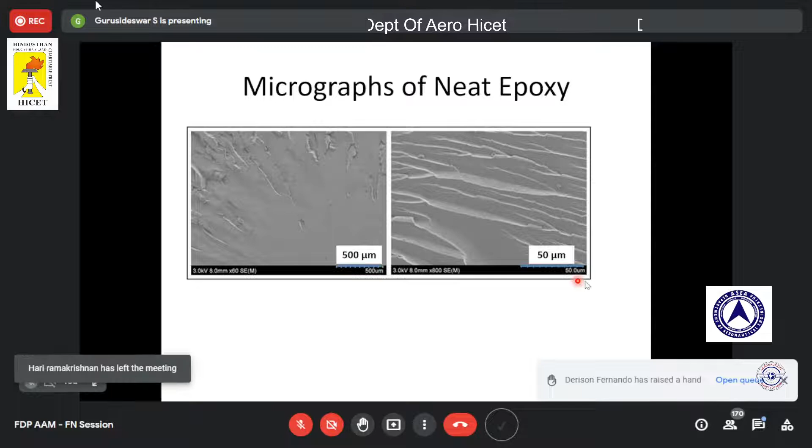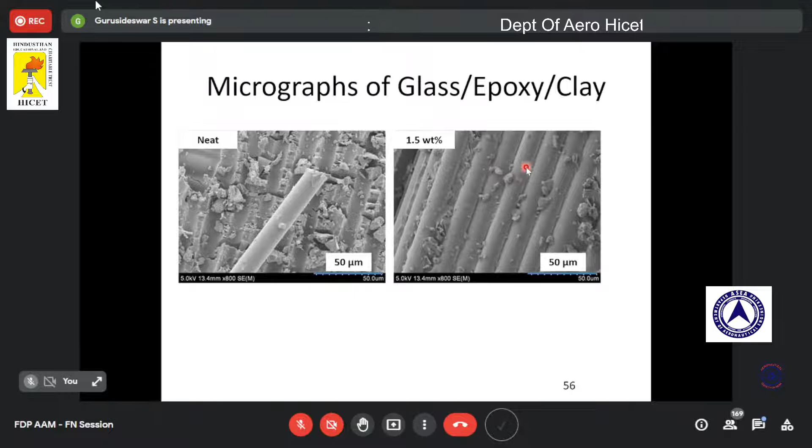Again, this is the figure for glass epoxy clay. You can see poor bonding between matrix and fiber for neat epoxy, but we could see good bonding for clay epoxy samples. Because of clay addition, we were able to get better bonding with the fiber. So this is what we can observe from this micrograph.

Again, this figure shows fiber breakage and debonding at high strain rates. Yeah, so these are my concluding remarks.

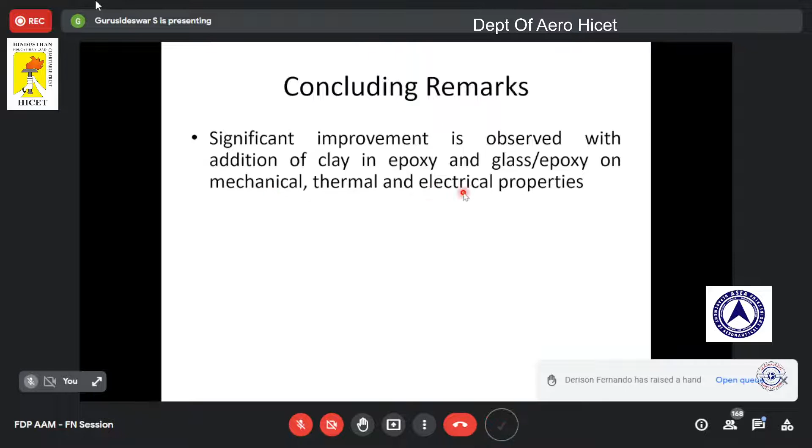The concluding remarks are: we have observed that addition of clay in epoxy polymer and the composite leads to good improvement in mechanical, thermal, and electrical properties. We have successfully employed a drop mass setup to achieve intermediate strain rates, and we have found that DIC is highly compatible with the drop mass setup to get reliable strain data.

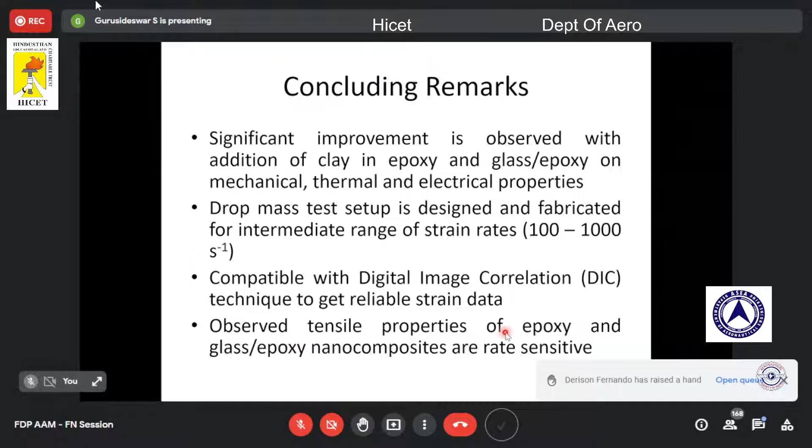So this is what we have discussed. Also, we have found that the tensile properties of both epoxy and glass epoxy composites are rate sensitive. The future scope is we can explore a lot on understanding the mechanism of nanostructure, so that we can get better engineering properties.

And also we can focus on the design and development of test standards. We don't have such standards for high strain rate testing. We have standards for quasi-static loading, but we don't have standards for high strain rate testing, so we can also focus on this area and develop standards for high strain rate testing.

Hi, sir. Thank you, sir. Thank you for your wonderful session. We are very happy to have you here. Now, I may request the fellow participants to raise your questions either by unmuting your mic or by posting your questions in the chat box.

Actually, we already have a set of questions from the participants. Sir, do you want me to read it out for you, or shall I ask them to unmute the mic? Yeah, I can see the questions. Let me go through one by one. Questions from Dr. Piyush Gaur. One minute, sir, excuse me. Mr. Derison Fernando, can you wait for a moment? Let the speaker complete the answers for the previous questions, and then he will come back to you for sure. Yes sir, you may go ahead, sir.

There was a question by Dr. Piyush: Did you work on developing nanocomposites for ballistic applications?

Good afternoon, sir, this is Dr. Piyush. Good afternoon. Yes, sir. I have a few questions actually. I wanted to ask - it was a very interesting work to see the effect of nano clay. I actually work in the area of ballistics, developing materials for impact and blast. So I was just wondering, have you worked on developing nanocomposites for ballistic applications or not?

Yeah, actually we have not focused on nanocomposites for ballistic applications, but our main objective was to understand its properties at high strain rate.